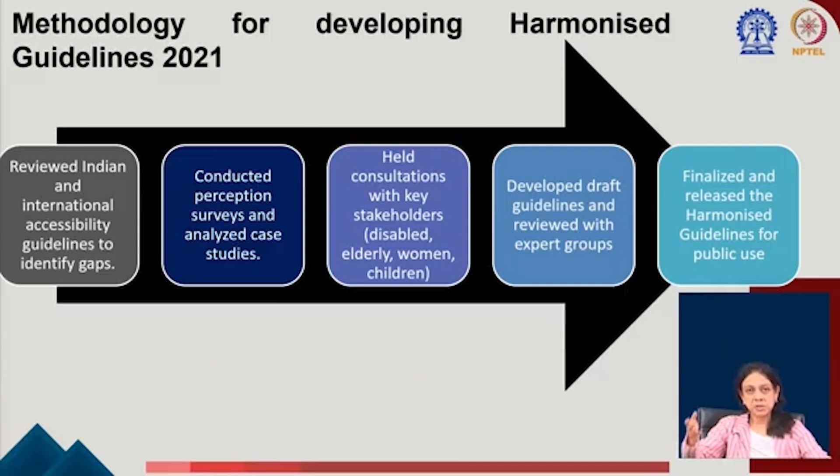It conforms to all the national policies on inclusion, like the national policy on women, national policy on elderly, national policy on children, the Accessible India Campaign, the Smart City mission, and the Rights of Persons with Disabilities Act, RPWD Act 2016. It aligns itself to the UN Convention on the Rights of Persons with Disabilities, the New Urban Agenda which talks of sustainability and inclusion, the SDGs, and the Incheon strategy, which talks about inclusion for persons with disability. There was a very robust methodology in formulating this, where perception surveys were conducted, stakeholders were involved, and after several rounds of iteration this harmonized guideline was framed.

So, who are the stakeholders? The user group includes persons with all kinds of disabilities, elderly, women, children, transgender individuals, and all other vulnerable populations. When we talk about stakeholders, people are there from both the demand side and the supply side. The user group means people who are demanding that. The next is built environment professionals, architects, city planners, engineers, designers, who are providing that. Both need to understand each other. Professionals need to understand the needs of persons with vulnerabilities, and persons with vulnerabilities need to convey their needs to the professionals. So all the stakeholders were involved here, and also implementing agencies like real estate developers.

Now, why are they very important? Because they are finally financing the development. They also need to understand the importance of this. The extra penny they might need to spend for creating an inclusive or universally accessible built environment or public space, they should understand the benefit of that, then only they will be interested to spend on that. So, they are also very important stakeholders.

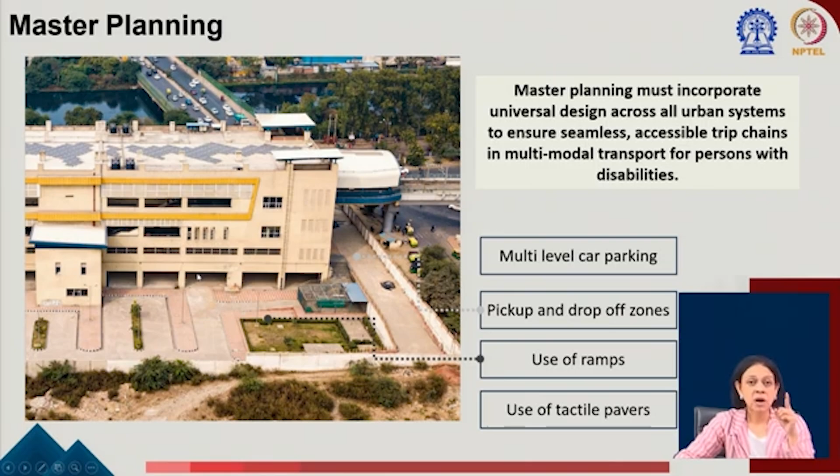We need to consider pick up and drop off zones. You may make your building accessible from the side with the help of ramps and all. But if your pick up point or drop off point from the car is placed at a distance far away from the building entry, and you do not have an accessible route to enter the building, then even if you provide a ramped access to the main building, your travel chain is broken. You are unable to provide seamless accessibility.

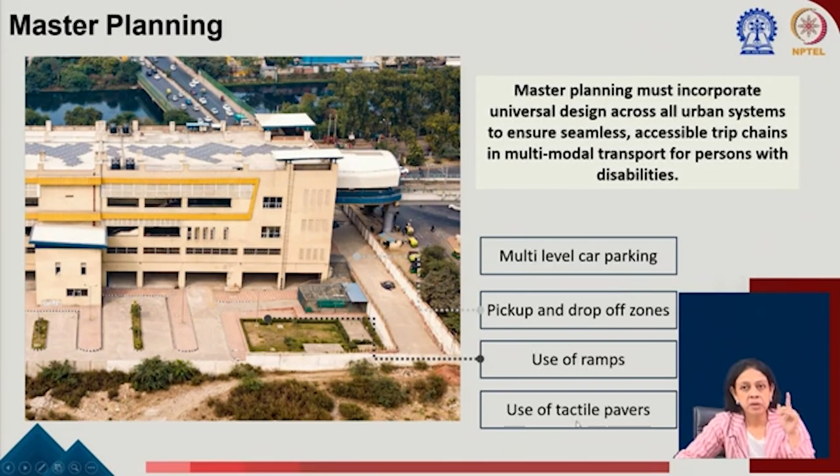Therefore, inclusive planning and universal design at the building level and the site level starts from site planning or master planning. So, within the site plan, you have to have multiple level car parking so that access can be provided at different points. You need to have the pick up and drop off zones I mentioned, use of ramps everywhere to negotiate the level difference within the site, and use of tactile pavers. We will talk more about this in detail, because these are for helping the person with vision impairment.

So, you have to manage those. Those who are architects and engineers know the standard height of a riser when we go for the tread and the riser. What is the standard height of the riser? 150 mm, or 166.67 in certain cases, because beyond that it becomes difficult for a person to climb. Similarly, if you have a large difference between the footpath and the road, that becomes non-negotiable easily, particularly for elderly or people with some kind of vulnerability. So, that is one. Ensure low curbs.

Wide walkways, because you have to take a wheelchair, we have already seen that. While we study these guidelines, try to relate them with the universal design principles we studied. We studied the 7 principles, which talked of adequate size and space for approach and use. So, wide walkways and of course, seamless circulation.

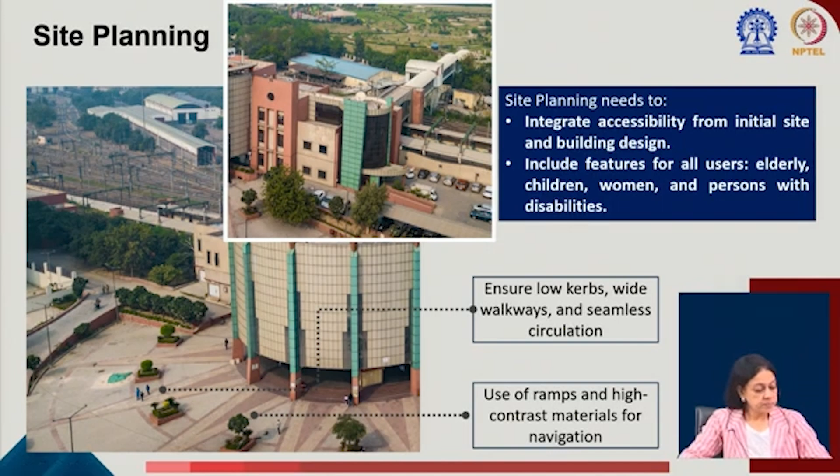So, now finally we come to the site entrance. Let us see what are the features here. First of all, you have the ramp. Now, a ramp is the most common thing anybody would provide, but it is not just a ramp. There are so many things to consider while you design a ramp. The slope of the ramp is important.

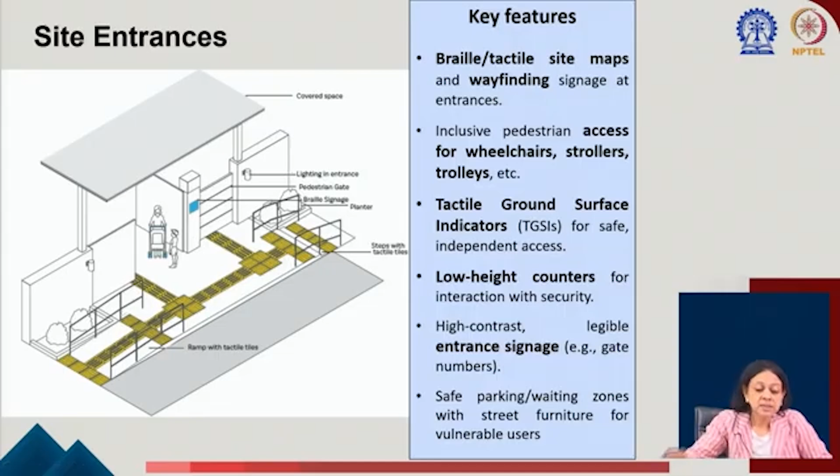The handrails are important. Whether the beginning or end of the ramp is marked by this kind of tactile tiles, that is important. Now, these tactile tiles are generally of 2 categories. We will discuss that, but let us first see how these tactile tiles are guiding.

So these are the 2 categories of tactile tiles. One is called... these indicators, these elongated strips, suggest the direction of movement, so a person who is vision impaired can understand that this is the direction he must follow. Like when someone comes here, he knows this is the direction he should follow to enter the gate.

And these are the warning tiles or hazardous tiles. Where are these provided? Whenever there is an end, say the end of a ramp, there is one row of hazardous tiles showing that this is the edge. Another very common example, though not directly related, is at the edge of a railway platform, where they are the hazardous tiles.

Another application of this is for direction change, when someone entering just follows the path. One very important consideration for universal design is to understand how a person is moving, and try to visualize the path he or she is following.

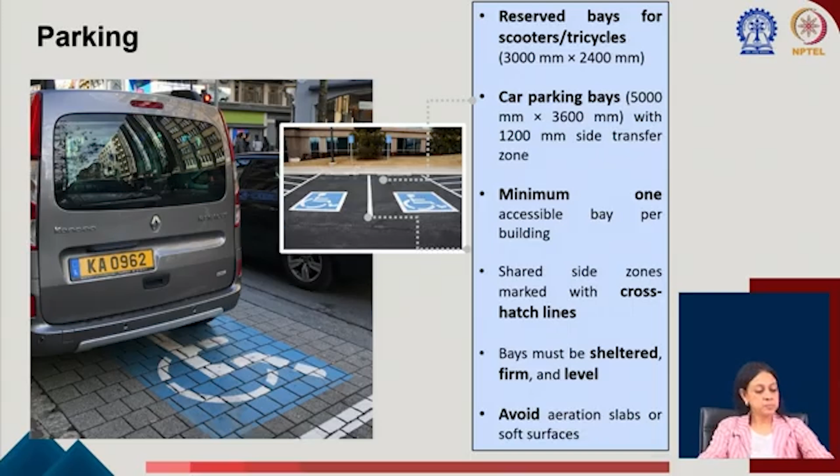Otherwise, whatever you design, one thing is very clear: there should not be any break. There should be seamless accessibility, what is called. So something like this, this bay is being shared - someone is parking here, coming down, going from here, and then with this ramp getting onto this accessible route like this.

Now I have been using the term access routes quite frequently. Within every site there has to be an accessible route or accessible walkway. Coming back to what is visitable and what is reasonable accommodation - even if it is not possible to make the entire site accessible, there must be accessible routes and walkways with the help of which someone from the entry point can go all the way and enter the building without facing any hassle.

Now all these are dependent upon the wheelchair movement standards, which we already discussed in the universal design principles - that is, the size and space you require for movement. So whether 1200 or 1800 or 1500, the designer has to decide, because it depends upon the number of users. Like for architecture, for any public building, we have standard norms in NBC for what should be the width depending upon total number of users. So here, not only the total number of users, but the total number of users who might be coming on a wheelchair.

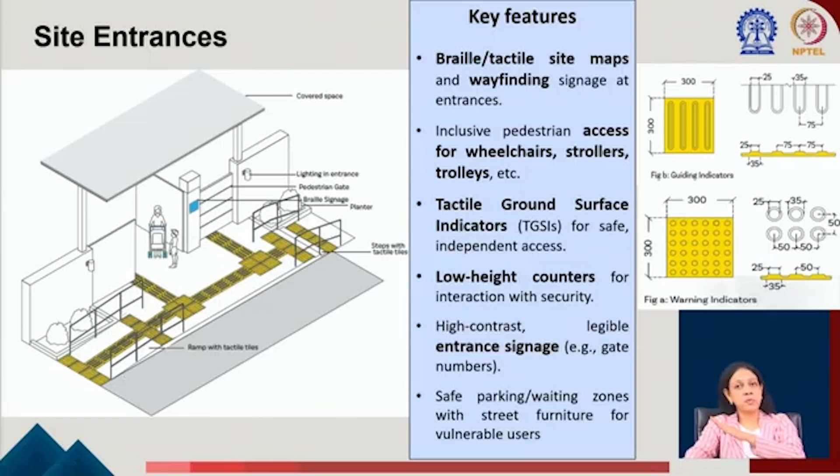Now this is not the slope of the ramp. When you have a ramp like this, that slope can be steeper. That slope minimum is 1:12, preferably 1:15. But when we are talking about an access route, then 1:20 is recommended.

Why? Because a ramp is for a shorter duration. You just push someone up, or even if you are self-propelling a wheelchair, you give that much effort to negotiate a small distance. But if it is a pathway, it is expected that people are going to move for a longer distance, so 1:20 is the comfortable gradient that is acceptable.

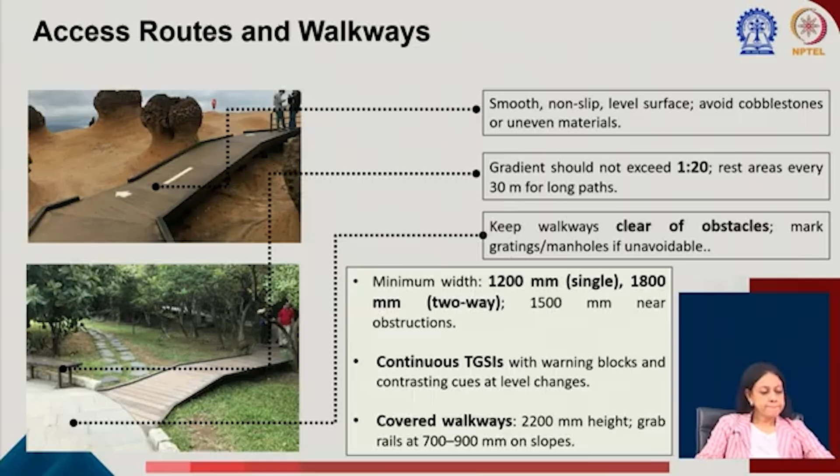So this is kind of that. And now, here what we have is the level changes. There should not be any level change within the accessible route. So if the situation is such that there are contours and the design requires a change, then if the level changes are less than 6 millimeter vertical change, no edge treatment is required.

6 to 15 millimeter, then you have to give some kind of molding or fillet or chamfering. These are required, and the level changes are to be marked. Grooves are to be covered for smooth access, otherwise there are chances that wheels will get caught. Also, we need to be very careful about placing gratings.

First of all, the gap should be less than 12 millimeter, oriented perpendicular to the travel direction. Why perpendicular? Because otherwise, if they are parallel to the travel direction, say these are two gratings, the wheel coming might get stuck. So to avoid that, it should be perpendicular to the travel direction so it can pass through.

And flush with the ground, manhole drains off center. Now these might seem very insignificant in the entire process of design, construction and implementation, but all of these are important. Otherwise this might lead to severe accidents. A wheelchair might trip, which would be really dangerous. So these are important.

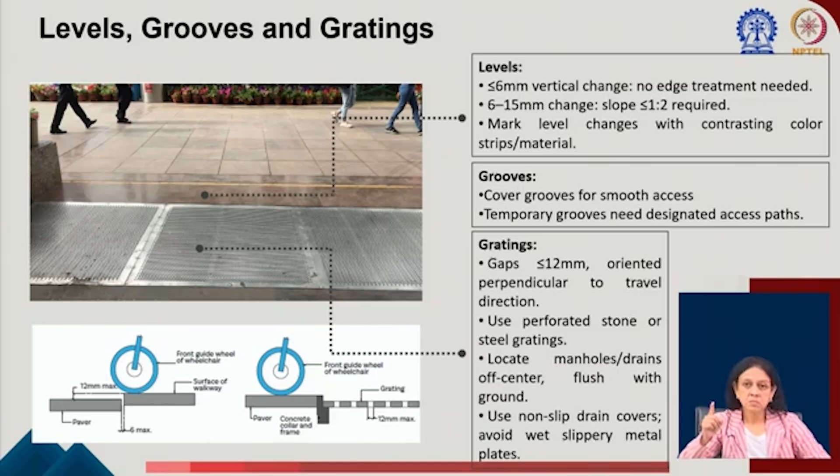Kerb ramps, what I was talking about. There are various types. First of all, one is called flared sides. That means, say this is the ramp part and these are the flares on the two sides. Why are the flares? For safety reasons again, because if by chance the wheel comes here, it is a sharp drop and someone might fall.

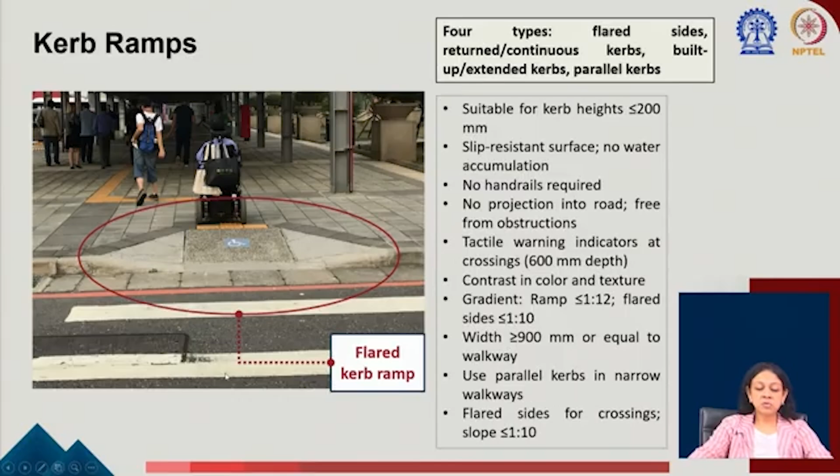So that's why flared kerb ramps are always preferred. Other things include slip resistant surface, and there should not be any water accumulation. No handrails are required for such cases because this is just a small level difference being negotiated. But the gradient is 1:12 maximum; sometimes with flares 1:10 is allowed, but not preferable. Width has to be 900 or equal to the walkway so it is possible to take it comfortably. So these are the kerb ramps.

Then you have the pedestrian crossing. When you have the pedestrian crossing, you talk about surface textures and colors, and the crossing must match the accessible pedestrian path. This is important to show continuity, meaning if the pedestrian path is of a particular color, the same color is continued, relating to perceptible information or simple and intuitive use, a universal design principle.

So what is the intuition here? Ease of intuition is important, because people know this is a pedestrian area, so they would easily relate to it. Not only pedestrians, but even drivers would say okay, this is the pedestrian zone, this is where people might be crossing, so I need to be careful and slow down. That's the simple and intuitive use.

You have this raised pedestrian crossing, continuous level. Sometimes, as I will try to give in my study material, whenever you have a zebra crossing, you have footpaths on the two sides that come down and then cross from the zebra. But something called a wombat crossing has footpaths on the two sides with a level cross, a bridge kind of thing or raised platform kind of thing, which connects the footpath at the same level.

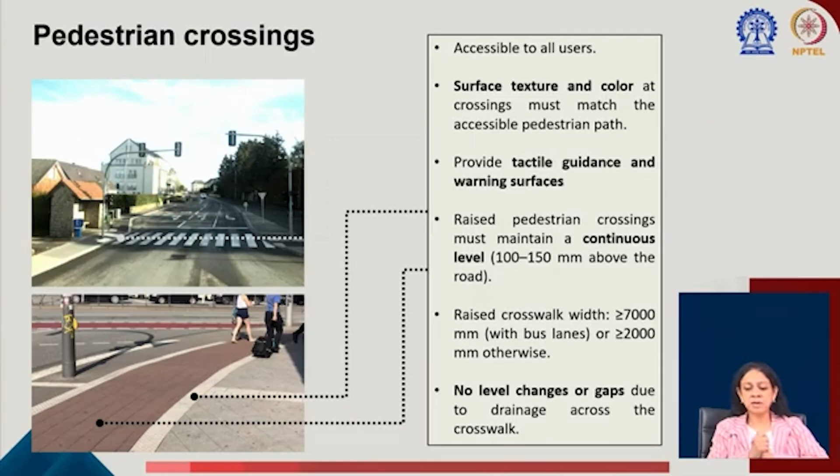So whenever there is this, it's called a wombat crossing. We will discuss this when we talk about pedestrian safety. We have a separate lecture on pedestrian crossing and safety, so I think I will be able to clarify it then.

Now, tactile guides are very important. Please make this clear that there are two types: directional as well as warning. Correct usage of these is important for proper navigation, because they are, in a sense, the people's eyes. People who cannot see, they exactly follow these routes.

Here it talks about the unobstructed tactile path with 2.1 meter headroom. This is simple architecture, as we know. What is the height of the lintel level of the door? 2.1, so that people even with a load on the head can pass. It's as simple as that.

So there should be clear space up to 2.1 meters, 1 meter, through which people can pass, and there should not be anything protruding within that clear zone, because that is very important.

Imagine yourself walking with your eyes closed. Generally, people with vision impairment carry a cane. When they walk with the cane, they touch the surface of the ground on the road, but if there is some obstruction on the road, they would face it.

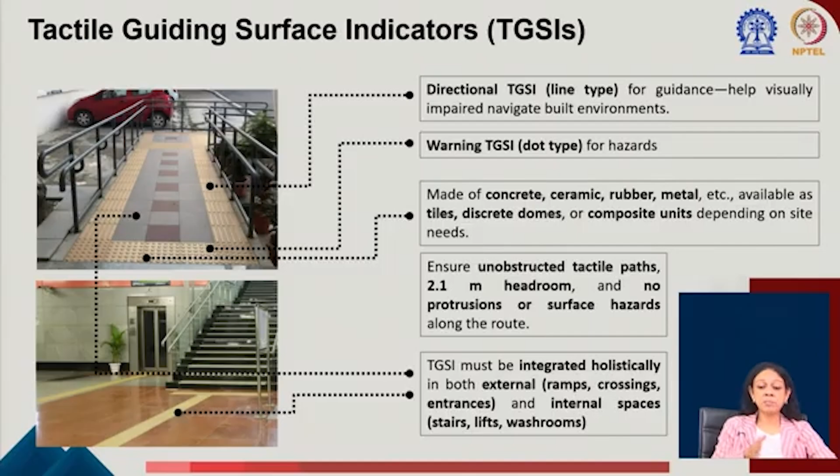Say there is a protruding branch of a tree while walking on the footpath, or maybe someone's home is by the side of the road and they've decided to keep the window open. These are protrusions onto the walkway, which might be extremely dangerous.

So this is how you design, and this is how direction changes are guided, like when you have a plus-shaped or X-shaped junction, or an L shape, because this is here.

So how do people follow this? People are coming like this, and then they come here. They decide that they need to change direction. Then they go there, touch here, find nothing. Touch again, find nothing. Touch here, find something - that means they understand this is the direction, not this, neither this.

But in this case, maybe when he comes to this point, he will find that there is something there as well as something there. That means there are possibilities of going on two sides, along two directions. This is how people are guided.

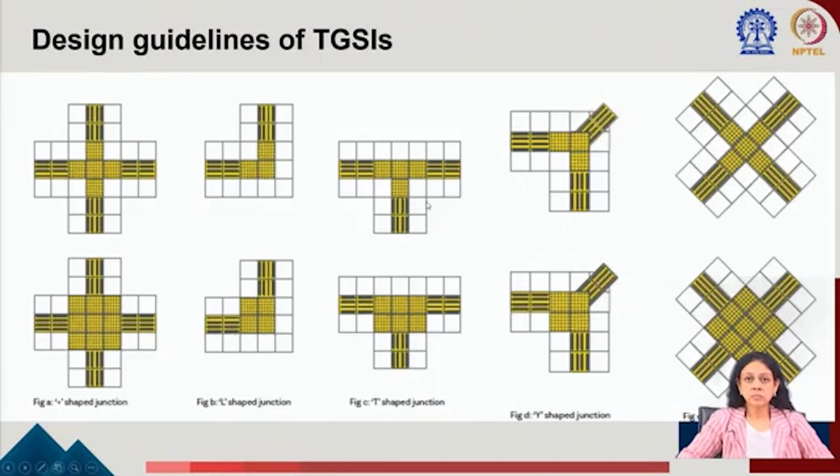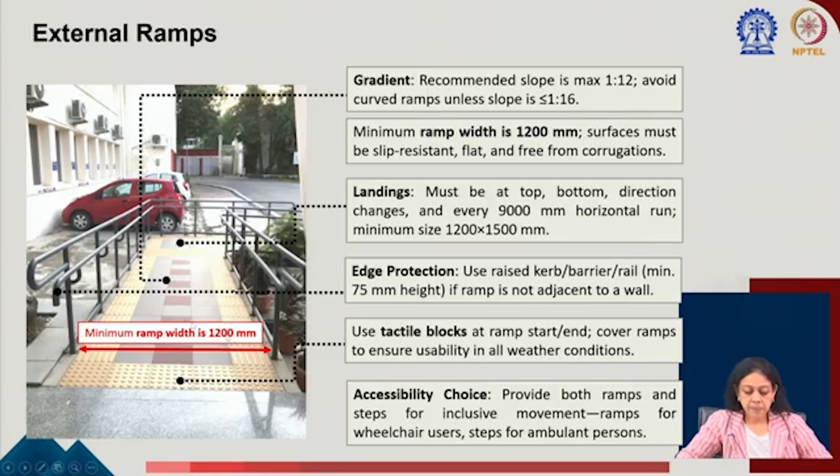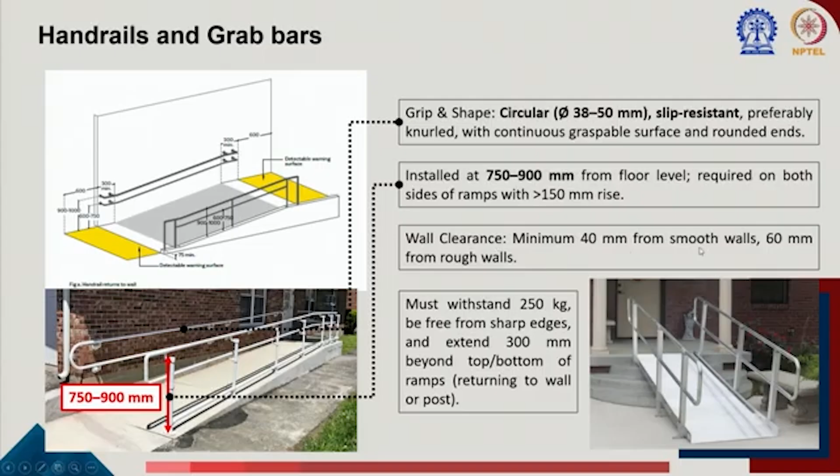Handrails and grab bars - every single element here is important, like the grip and the shape. What should be the diameter for a proper grip? What should be the height? How much should be the wall clearance? If it is too close to the wall, you cannot have a proper grip.

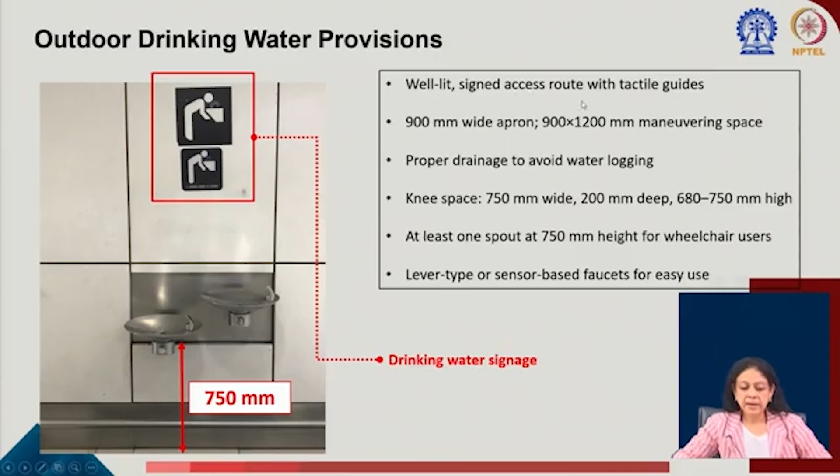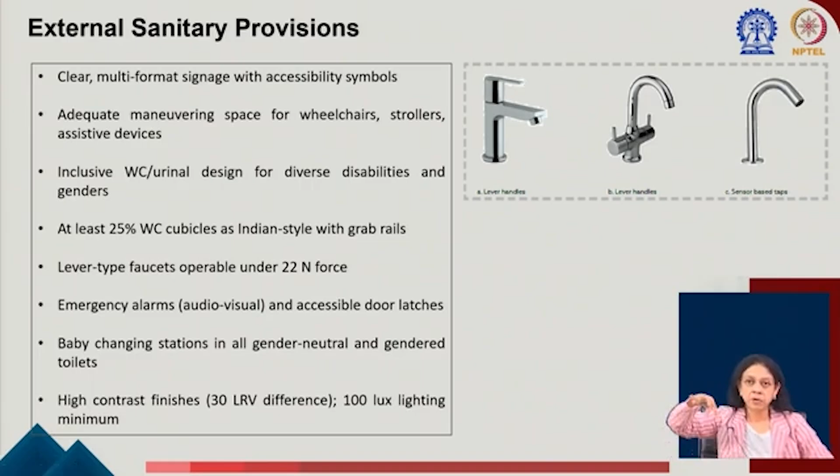Outdoor drinking water provision: well lit, signed access, proper drainage, adequate knee space. External sanitary provisions - what should be the type of handle, either sensor operated or a lever handle which can be operated by the fist. You don't need to hold it, so a lever type faucet.

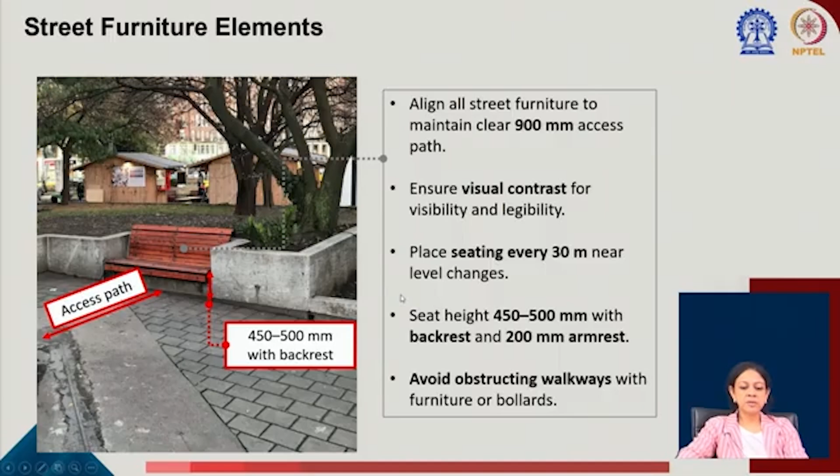Street furniture: align all street furniture to maintain a clear 900 mm access path. Visual contrast for visibility and legibility. Place seating every 30 meters near a level change, with adequate seat height. Gap between bollards, height of bollards, contrasting colors.

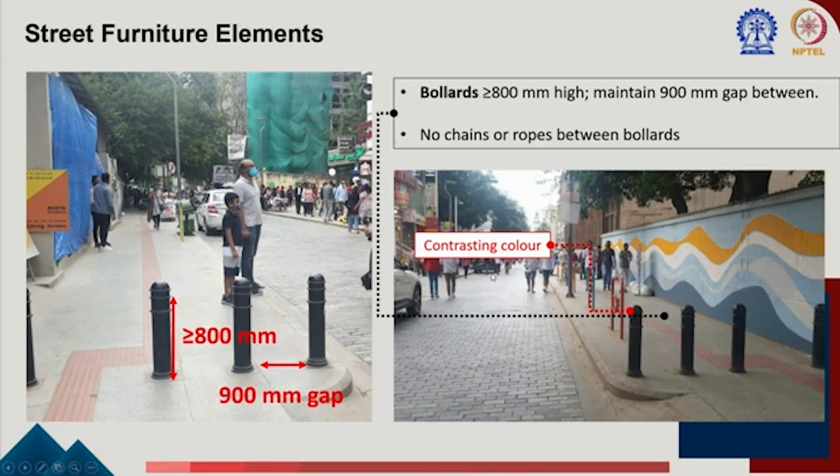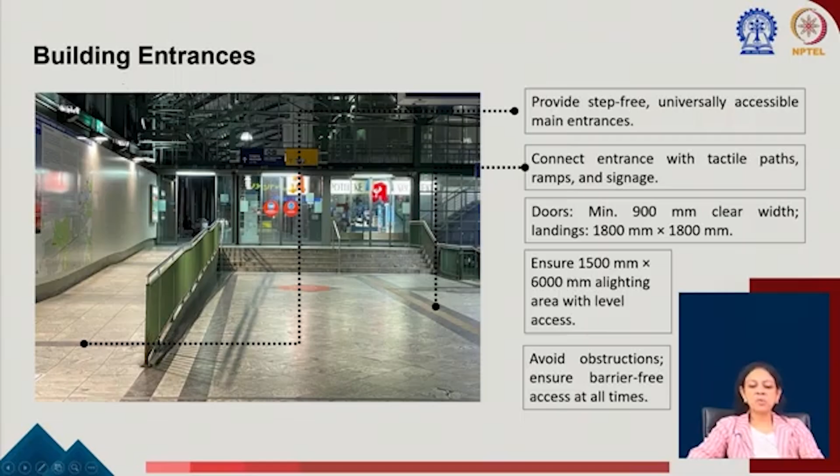Now coming to the set of internal elements, let us quickly go through this. First, building entrance - the dimensions are the same, but you have to visualize them in the internal setting: what should be the minimum door width, how you connect the various zones, waiting areas, reception counters and spaces. These anthropometric dimensions and seat heights are the same whether it's an external or internal environment, given in detail in the harmonized guideline.

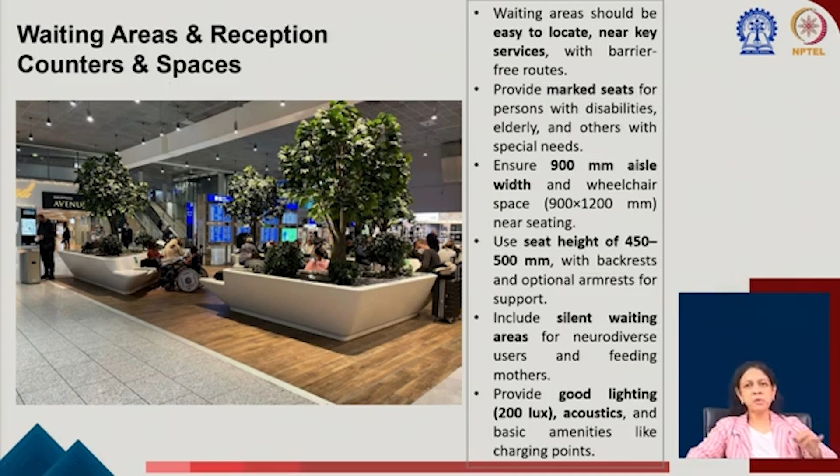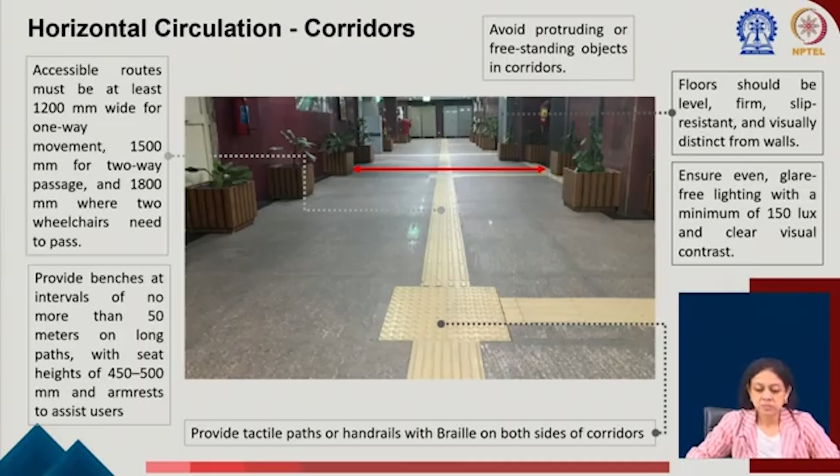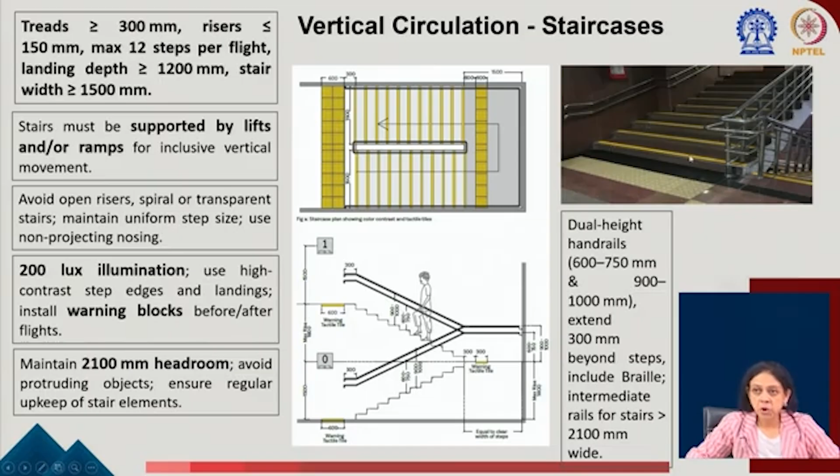Now the vertical circulation, these are the same as we have in the architectural standards, but what additionally do we see here? We see here that at the beginning and end of every flight we have these hazard tiles and dual height handrails. So, like this we have to put the tiles, and the edge of each of these are to be marked. Ramps same, beginning and end marked. Maximum slope we know.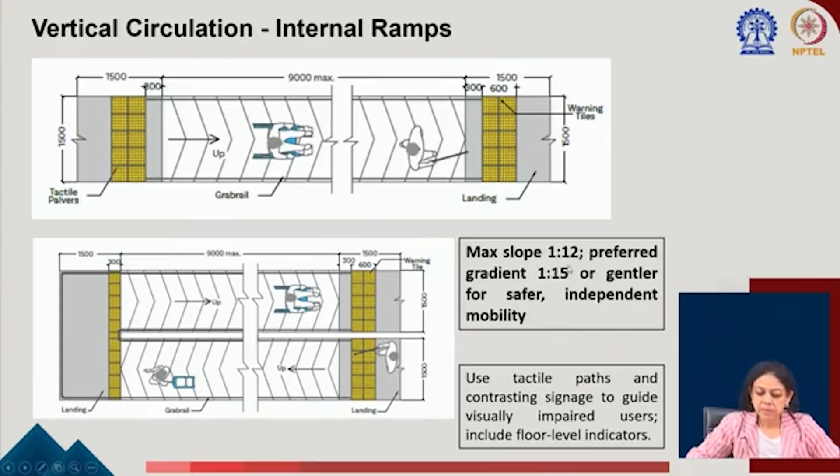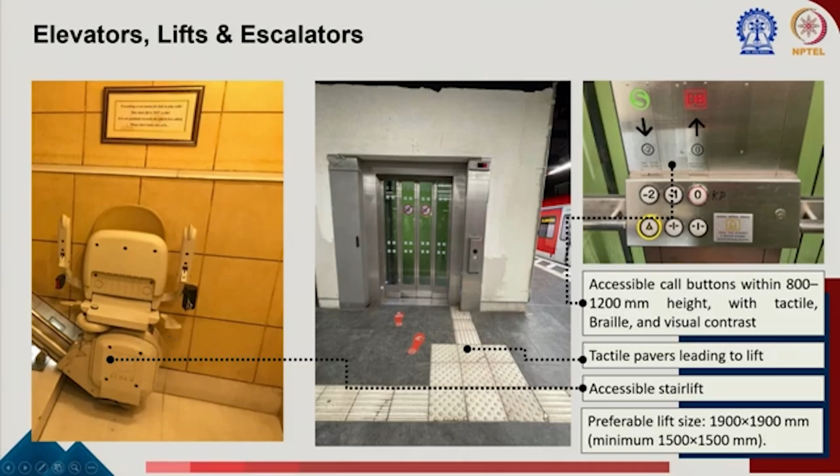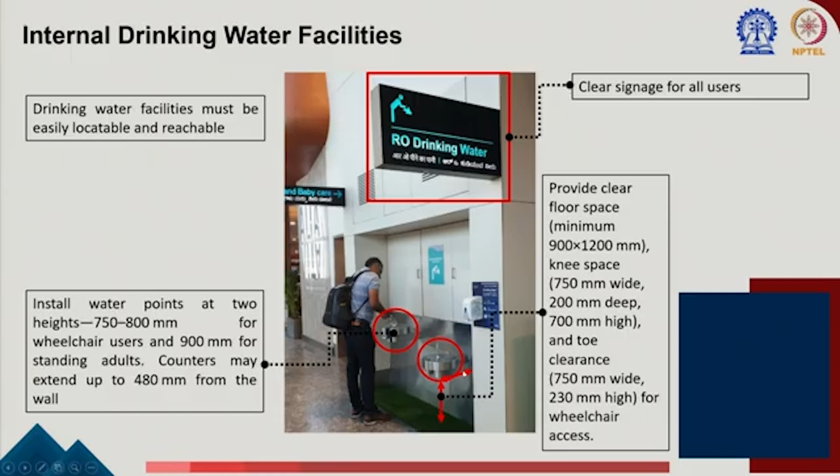Options: we know what the parameters for the elevator should be, but when you do not have an elevator, you can think about other options like providing a stair lift like this. Internal drinking water facilities, what should be the height, flexibility, again universal design principle, provide clear floor space so that this is not blocked. Why? Someone might need to take the wheelchair down here, below here, and then use this for drinking water.

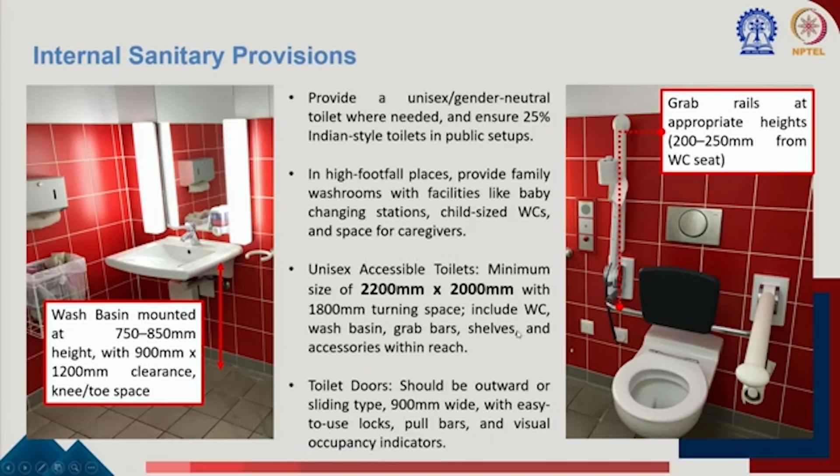Similarly, no blocking the space below the wash basin, grab bars, and unisex accessible toilet sizes are there. Last part, that is the information and the wayfinding system. So, here now we have different types of signage. Sometimes these are directional, sometimes these are information. So there are many.

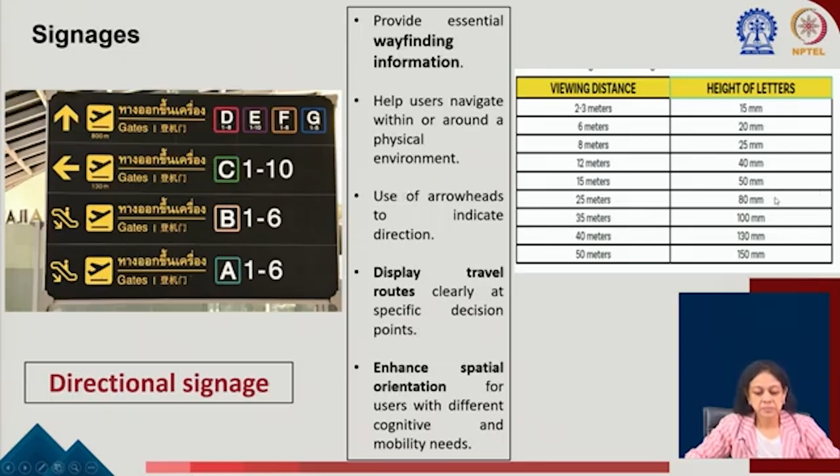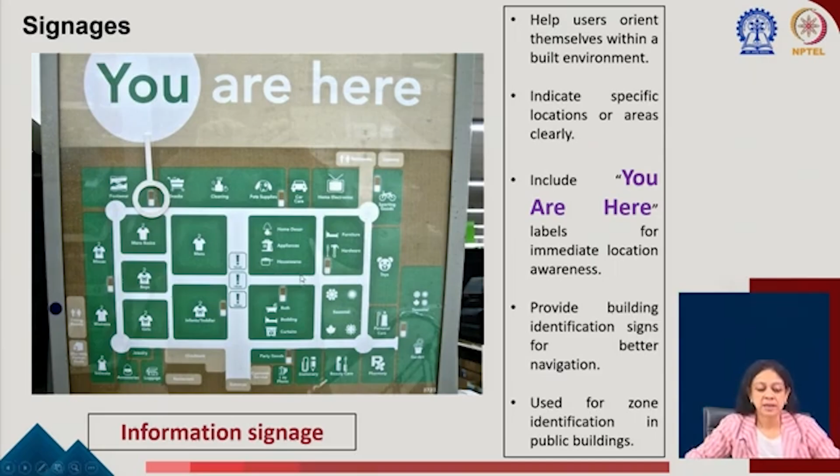So, what we need to understand is what the design parameters are, like the viewing distance and height of the letter. If you have a huge public space and you have designed a signage system, what should be the minimum height of the letter? How can you increase the legibility? By you are here maps, because these help people identify, and these can be embossed so that people can touch and understand. You can have one map serving both purposes.

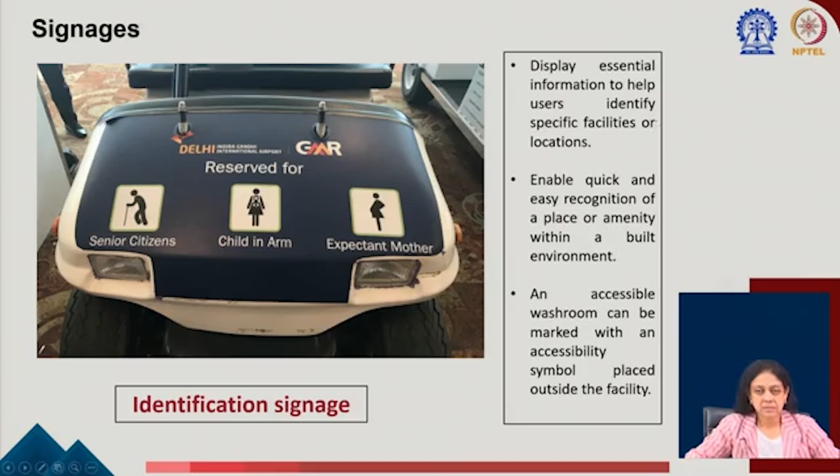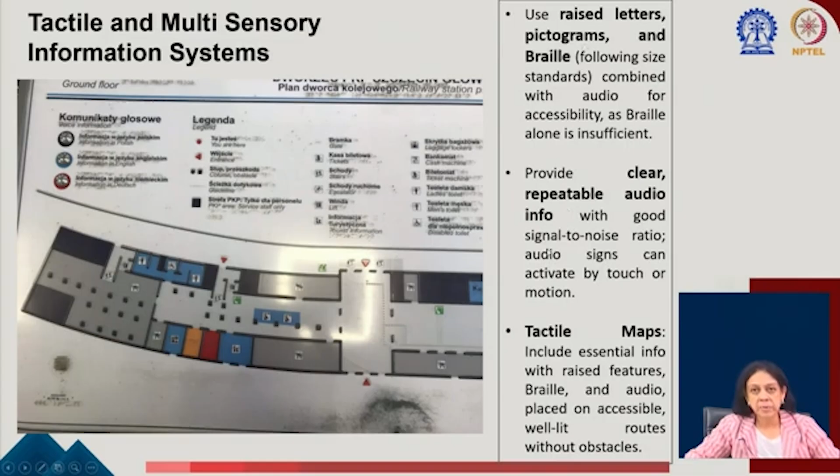Display essential information, no cluttering. Proper signage. Tactile and multisensory information system. Use of raised letters, pictograms, braille. Clear repeatable audio, perceptible information. I think these are all applications of the universal design principles which we have studied. Placement of the signage, because your user is sitting and not standing.

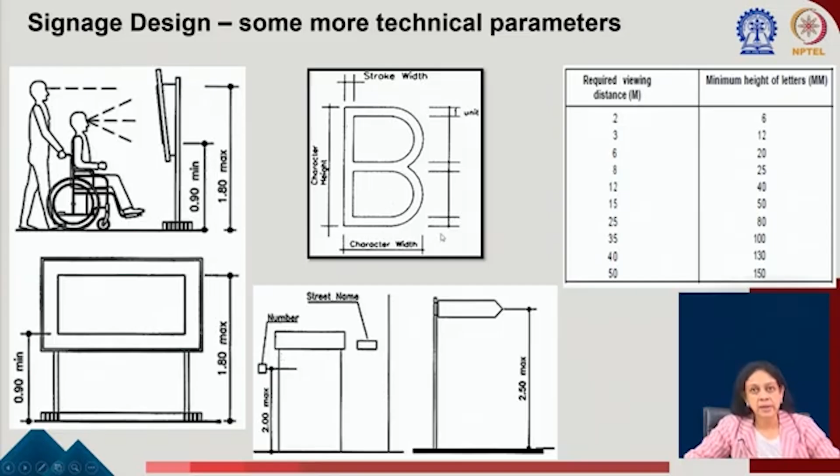What should be the stroke width of the letter for clarity, what should be the choice of the font, what should be the spacing between the alphabets. Too little space sometimes makes the letters appear merged together, and if you have too much space it might appear disjointed. Upper and lower case many times give better readability. Making bold makes it more visible, but it should not appear like a blob of ink.

Now this is the additional part which I wanted to talk about, that is the building management and access handbook. Because many times what we see is that buildings provide accessible features, but when they start operating, these features are not maintained properly. As a result, building management, or how to keep the accessible features working, is important. People should also be told about the accessible features. So what is used to achieve universal design is an access handbook, which should record and explain the features of a building that are key to universal design.

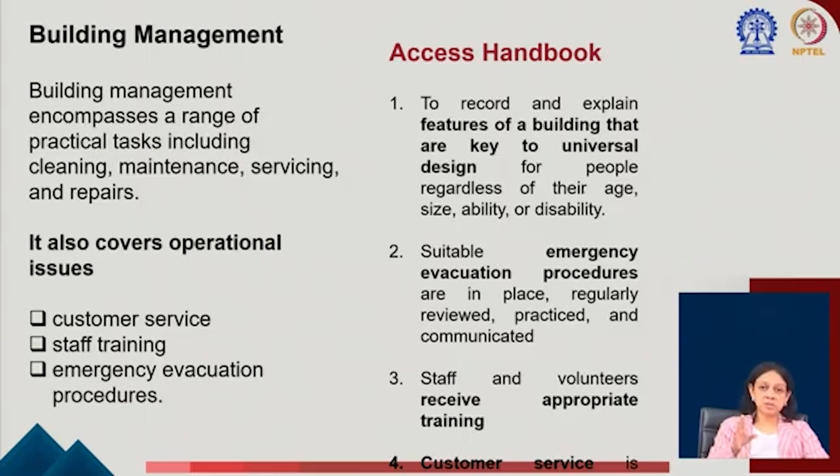What is the emergency evacuation procedure? What are the routes? Which of these routes are accessible to all, which is the universally accessible route, that should be there. The staff and volunteers should have regular trainings, that is important. So this is a very important part, because during any kind of man-made or natural disaster, the people who are vulnerable become more vulnerable. So exit stair signage, visual alarm.

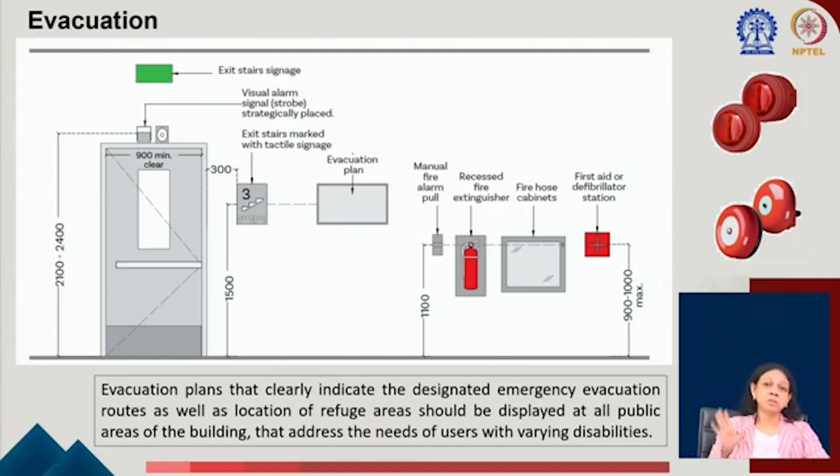So whenever people are going out or being evacuated, it is important that you also think about the people with sensory disability. If someone is blind, there should be proper audio instruction. If someone cannot hear the siren, then there should be a proper light instruction that there is an emergency and which side to go. So evacuation is very important, and these are included in our recent version of the harmonized guidelines, which makes it very special. So we'll go over some good practices in the next lecture along this line.